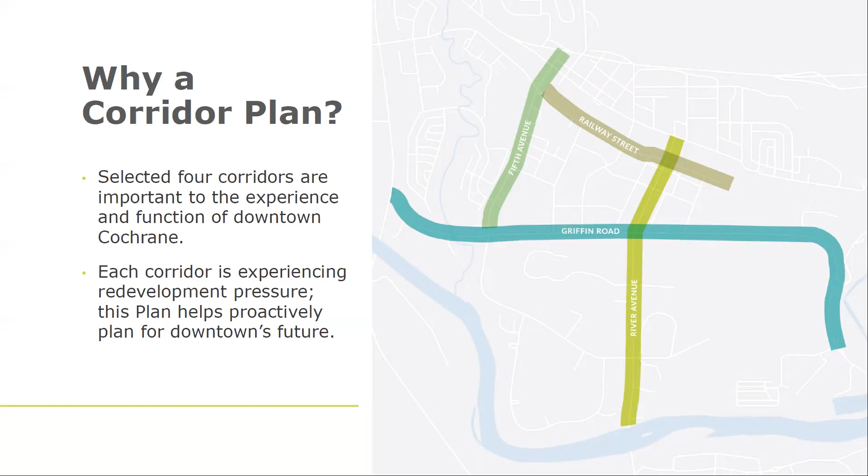As many might be aware, the town is also making some significant investments in the downtown to improve connectivity, support economic development, and continue to improve the high level of service for residents and businesses. As redevelopment and investments continue to occur in the downtown, it's critical that relationships between these future land uses, the built form, and adjacent corridors are considered, and the improvements support the town's long-term vision.

So what is a corridor plan? It's an aspirational document. It outlines how streets can function to meet the broader community objectives. It provides direction and expectations for development and decision-making along these corridors.

What the corridor plan is not, though: it's not a detailed design. It's not plans or detailed plans for each corridor. It's not capital forecasting for implementation for each of these corridors. And it's not a phasing plan and/or mandatory checklist. It's really intended to set a vision, create inspiration, and create dialogue between the town, future development opportunities, and future investments along each of these corridors to make sure everything's in sync.

The approach that we took to create the corridor plan had many steps, and the project kicked off sometime ago in July 2019 with an initial focus on understanding the corridors. It focused on researching best practices and preparing project materials for public outreach.

Later in the summer of 2019, there was extensive public engagement held. There was an online survey that many watching this and listening may have participated in. We received over 500 responses to that survey. There was also some public pop-up engagement along each of the four corridors, and a presence at Spray Lakes Rec Center and the night market that, again, folks might have seen and/or participated in.

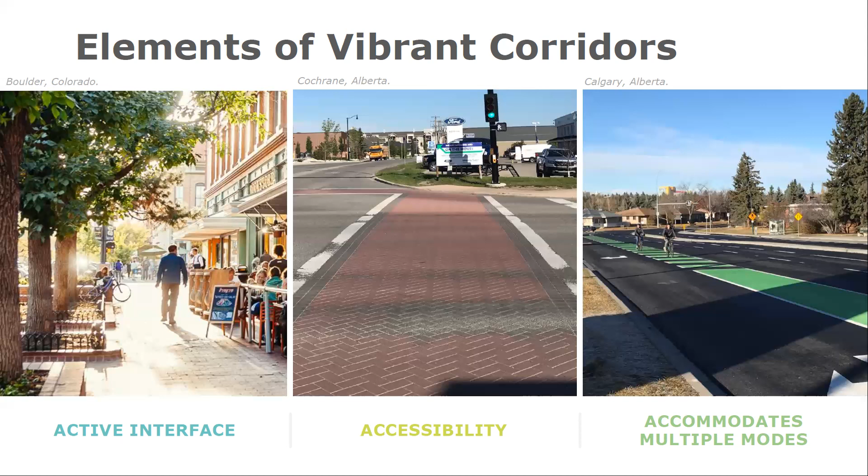Elements like an active interface create a visual engagement between individuals on the street and those on the ground floor within buildings. Accessibility ensures that the physical environment is comfortable for everyone to navigate, regardless of age or ability. Corridors that accommodate multiple modes enable the ability to safely experience corridors while walking, riding a bike, on transit, or in a car. Other elements include safety.

Users feel welcome and able to use the space throughout the day or night. There are multiple reasons to be along a corridor, which can support a wide variety of activities, events, and land uses, for example. And the last one here would be comfort - that everyone along the corridor enjoys it and it's easy to use. So those are different elements of vibrancy and bringing those corridors to life.

Along with the function and different elements, those are a number of different pieces that we looked at when we were reviewing the 4 corridors we're talking about today. And with that, I'll pass over to Leighton Ginther to speak to each of the 4 different corridors.

Thanks, Chris. As mentioned, we'll be focusing on 4 different corridors: Fifth Avenue, Railway Street, River Avenue, and Griffin Road.

So Fifth Avenue - for each corridor we've undertaken some analysis, and you can see based on the map in front of you that this corridor is just over 1 kilometer in length. Sidewalks total about 2,200 meters, largely on both sides of the corridor. If we were to calculate the total area of this corridor, it'd work out to be about 6 acres. The corridor averages about 20 meters in width and carries approximately 6,000 to 13,000 vehicles per day.

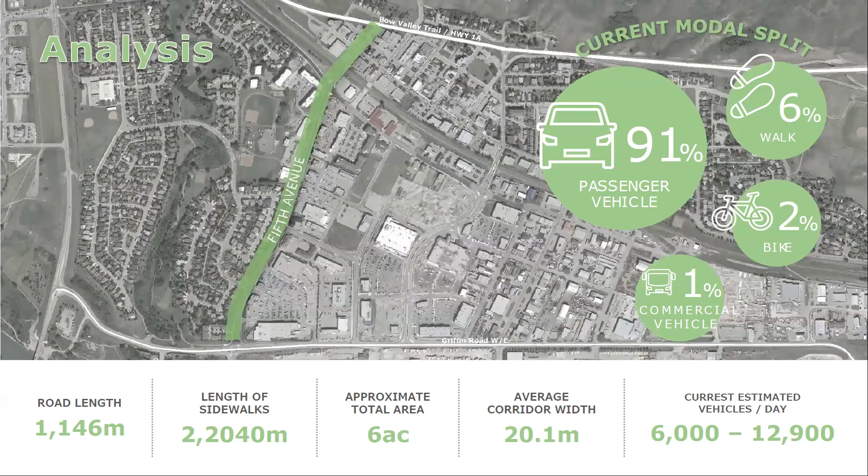In looking at each of these corridors, we also examined the existing policy currently in place. Connecting Cochrane, which is Cochrane's transportation master plan, identifies that this corridor, Fifth, is a primary collector and will have up to 4 travel lanes.

The Integrated Downtown Action Plan is the plan that governs the actions around downtown investments. That plan acknowledges the need for streetscape improvements to create more pedestrian-friendly corridors, to accommodate cycling, and to provide additional pedestrian crossings. The plan also encourages development to move closer to the corridor and be oriented to the street to create a stronger relationship and greater comfort and safety for pedestrians.

The land use bylaw regulates and controls the use of parcels within the town. This land use bylaw is currently under review, and some of the direction being provided includes examples such as no parking in the front yard abutting a street. Building entrances need to be oriented to the street and have things like canopies and awnings that provide comfort and protection against the weather for pedestrians.

Facades should include about 50% glazing, meaning transparency or windows that allow people inside a building to see what's happening on the street, and people on the street to see what's happening in buildings - creating a stronger relationship and greater pedestrian interest. Finally, buildings taller than 3 stories must be stepped back, so anything above 3 stories needs to be set back away from the street, once again to create a more comfortable environment for pedestrians.

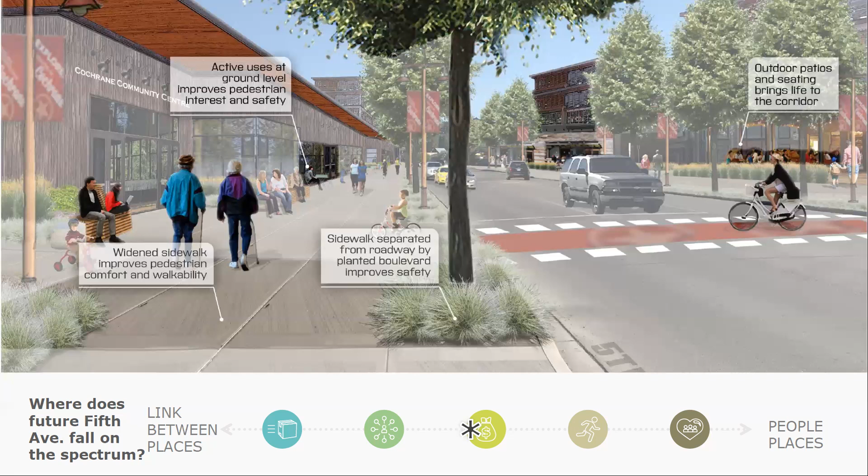On the other side of the corridor, we've simply indicated that as redevelopment happens, there could be opportunities to encourage things like outdoor patios and seating to bring additional life and vitality to the corridor. So as we contemplate how this corridor could function in the future, we see it moving towards the right on the spectrum, towards more of a people place.

The second corridor is Railway Street. Similar to the exercise we showed earlier, you'll see that Railway Street, similar length to Fifth, doesn't have the same length of sidewalks, about 630 meters of sidewalks. If we were to calculate the total area of this corridor, it would work out to be about 6 acres. The width of the corridor varies fairly significantly across its length, from 15 to 23 meters.

It handles a little less traffic than Fifth does, at 7,500 vehicles per day, but a very similar modal split at 90% vehicles, 6% walking, 4% cycling, and 1% commercial vehicles.

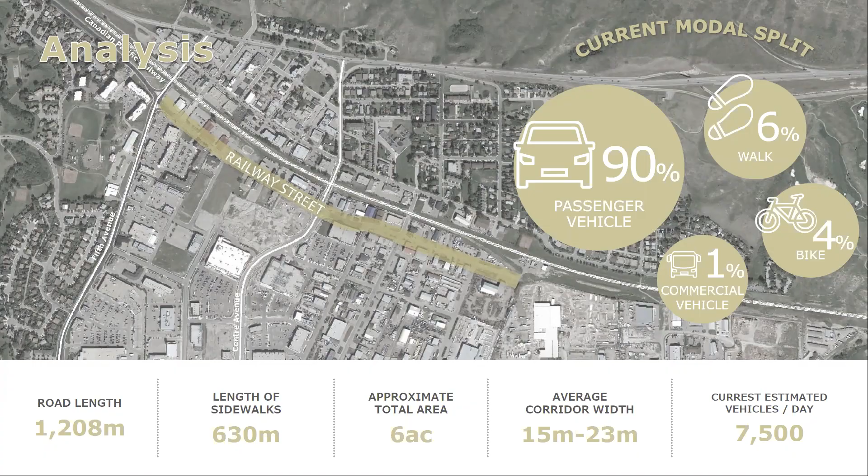In terms of the policy context that has influenced this corridor, Connecting Cochrane once again recommends continuous sidewalks on both sides of the street, and recommends that bike lanes be constructed from Center Ave all the way to Highway 22, recognizing this is a really important east-west connection that could be very important for cyclists as well.

The Downtown Action Plan talks about a number of developments along this corridor: the closure of 4th, the CP Rail pedestrian crossing, continued redevelopment of the quarry site, and improved connectivity — all anticipated to encourage redevelopment and intensity of uses along this corridor.

Similarly, the land use bylaw is contemplating prohibiting parking in the front yard abutting a street, ensuring building entrances face the street, that there's glazing and transparency to engage pedestrians, and that more intensive development is stepped back to create a comfortable environment for pedestrians. Similarly, the Western Heritage Design Guidelines would apply to development along this corridor.

In engaging stakeholders and the public, we heard similar sentiment that this corridor is predominantly used to access and run errands and to access other amenities. 20% of people responding indicated that they use this corridor to find parking.

Roughly about 50% indicated that the corridor is good in terms of an efficient link, and just under 40% said it's more or less okay as a people place. Some comments noted it appears unfinished, it lacks sidewalks, bike lanes would be great, a transit hub will be an important corridor to set the precedent for redevelopment, it's got significant redevelopment potential, and there's an opportunity to prioritize pedestrians and bikes, among other comments we collected.

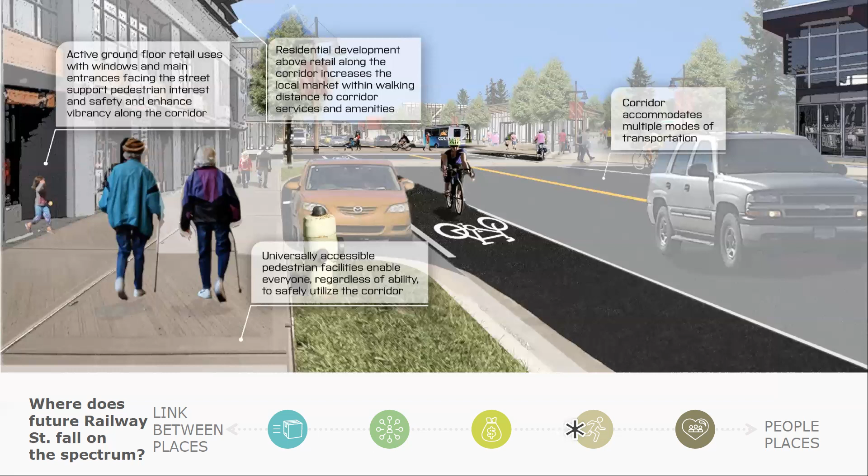Residential development above retail increases the local market within walking distance, supports local business, and adds to the vitality of the corridor. You can see we have dedicated cycling facilities on street, and it's really important that this corridor accommodate multiple modes of transportation, given the transit hub and how it will function, moving people between pedestrians, transit, cycling, and those driving as well. So we see the opportunity for this corridor to move towards more of a people place, in addition to continuing to support the movement of vehicles.

River Avenue - you'll notice we broke it into two pieces, but in its entirety it's over 2 kilometers in length. Sidewalks are fairly periodic at 577 meters, works out to be about a 10-acre area in total size, and a fairly consistent corridor width at 20 meters, handling roughly 2,000 to 5,000 vehicles per day.

Slightly different modal split, with a bit lower at 88% being passenger vehicles, then split 5% both for walking and cycling, and 1% for commercial vehicles.

So the policy context that applies to River - Connecting Cochrane talks about recommending continuity of sidewalks, extending sidewalks along River Avenue north of Griffin, and also recommends bike lanes on River Avenue south of Griffin. It underscores the importance of River Avenue as a key recreation commuting corridor that links downtown and the east end of the neighborhood to the Bow River itself.

The integrated action plan for the downtown talks about the importance of enhancing River Avenue to improve the visual and physical connection to the Bow River itself. The land use bylaw speaks to prohibiting parking and loading or outdoor display areas in the front yards of development abutting a street, and that in some cases landscaping may be required in those front yards. The Western Heritage Design Guidelines would also apply to development along this corridor.

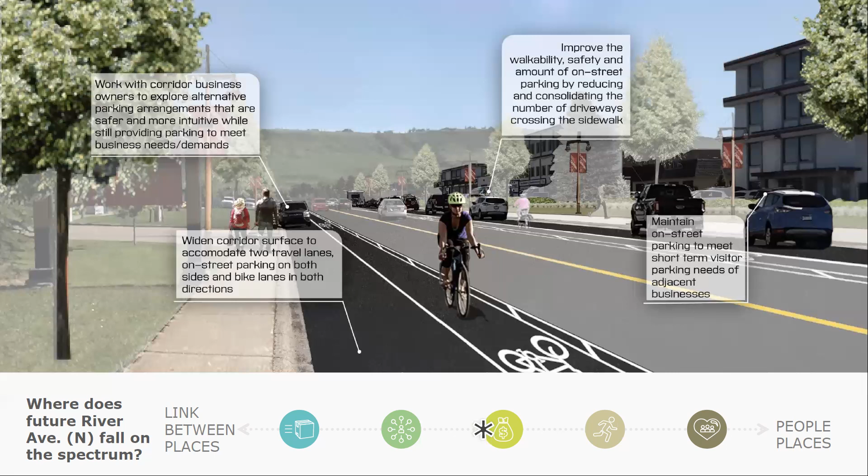We would want to maintain on-street parking to meet short-term visitor parking needs of adjacent businesses, totally recognizing that. But we think there's an opportunity to improve walkability, safety, and the amount of on-street parking by reducing and potentially consolidating the number of driveways. That means working with local businesses to think about alternatives so we can continue to provide the parking required to support business, while doing it in a way that's safer, more convenient, and easier to navigate. So we see this corridor moving toward more of a balance between link and people place.

Given what's happening on the other side, currently undeveloped, there's an opportunity to influence the form of development so that it contributes to the character and functionality of the street for all users. So we would see this corridor functioning largely as a link currently.

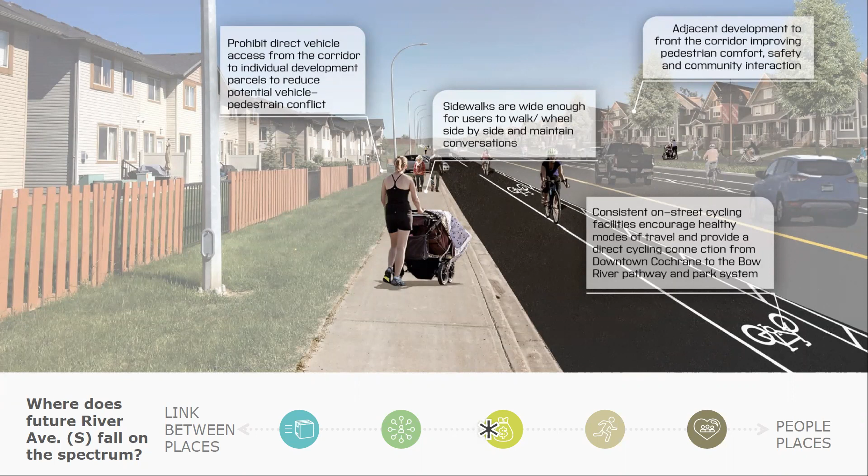When thinking about possibilities going forward, we're suggesting on-street cycling facilities to create that connection, as supported and indicated in other policy documents, just to link the downtown to the Bow River and the amenity it provides. We'd want to ensure sidewalks are wide enough for users to walk and wheel side by side and maintain conversations. We would hope that as redevelopment occurs on the other side, development would front the corridor, improving pedestrian comfort, safety, and community interaction. So we think this corridor could also function as more of a people place, moving right on the spectrum going forward.

Finally, Griffin Road is the last corridor we'll cover. It's the longest of all the corridors, more than 3 kilometers in length, with about 1,500 meters of sidewalk covering about half of that. It's 16 acres in size, with a fairly consistent corridor width of 20 meters, and handles a similar volume to 5th Avenue at 6,000 to 11,000 vehicles per day. As expected, there's a high percentage of passenger vehicles at 95%, with 1% walking, 2% cycling, and 2% commercial vehicle traffic.

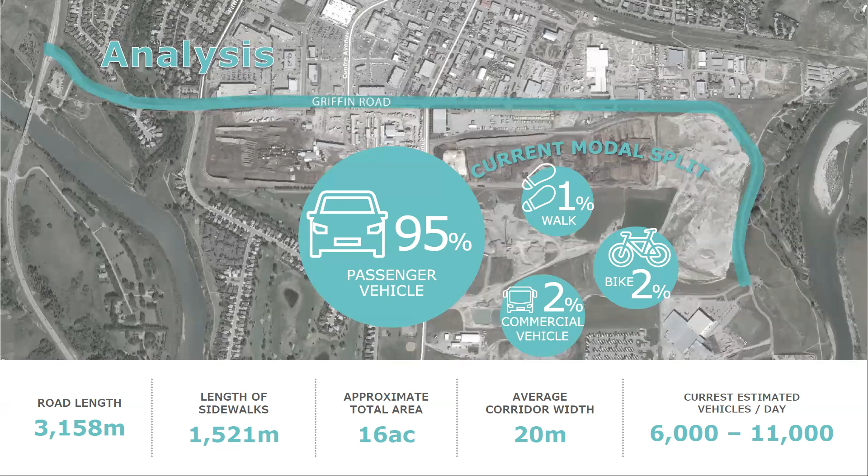The policy relating to Griffin, Connecting Cochrane, identifies it as an arterial road that will carry 4 travel lanes with a median, sidewalks, and bike lanes. The Integrated Downtown Action Plan anticipates significant redevelopment potential along this corridor, given its proximity to downtown and the Bow River. The land use bylaw indicates no parking, loading, or outdoor display would be permitted in the front yard of development, and landscaping may be required to soften those front yards in some cases. The Western Heritage Design Guidelines would also apply to development along this corridor.

When asked similar questions, feedback indicated that 33% of individuals accessing and utilizing the corridor were running errands and accessing amenities, while 30% accessed recreation, which is no surprise given the Spray Lakes Rec Center at the end of Griffin. People indicated 47% felt it was a good and efficient link, or slightly efficient, while 38% said bad, but not awful, in terms of being a people place. Feedback noted that it's fast, noisy and busy, but provides direct and convenient vehicular access to many businesses and industry within the town of Cochrane. It also feels old and needs an update.

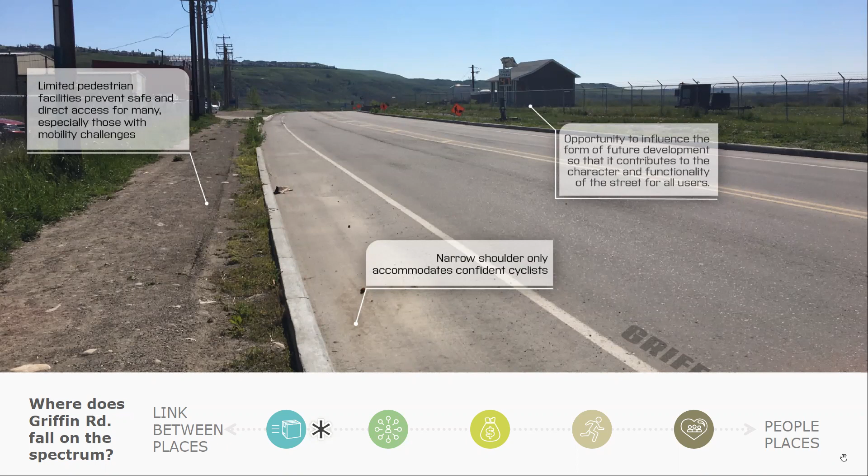In looking to the future and what might be possible, we've suggested that, similar to the connecting Cochrane, there be bike lanes included on the street to accommodate a wide range of existing and future mobility, and that facilities be formalized to create direct connections for people using different modes of transportation. We would limit vehicular access primarily to intersections, and create a center median to provide a visual break and a little bit of a green break between the four lanes of traffic, along with things like street trees to reinforce the significance of this corridor as an important corridor within the community.

So we think there's an opportunity that Griffin Road itself could be able to move from more of a link to a people place.

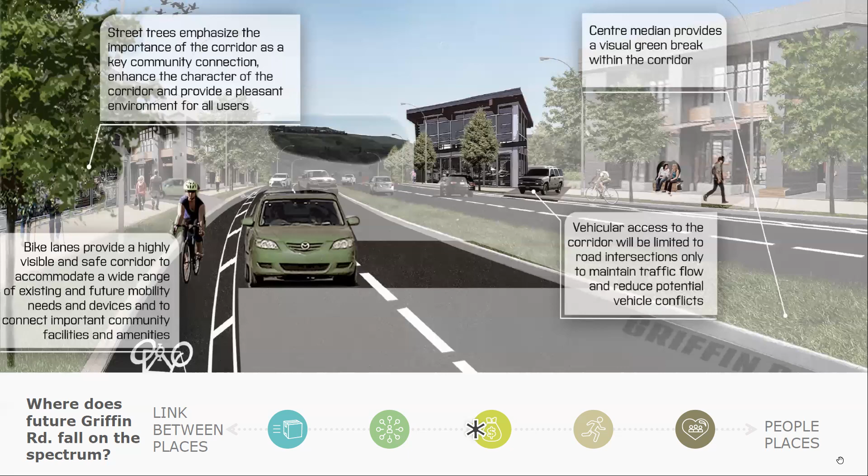As previously discussed earlier in the presentation, the process for the corridor plan began in 2019, actually the summer of 2019. It did begin with a bit of research into each of the corridors, and an engagement plan was created and initiated in the summer.

We also went out to each of the different corridors and met with people that were actually on the corridors. These were the pop-up engagement events, and again we had quite a good turnout, meeting with over 100 people as they were passing by.